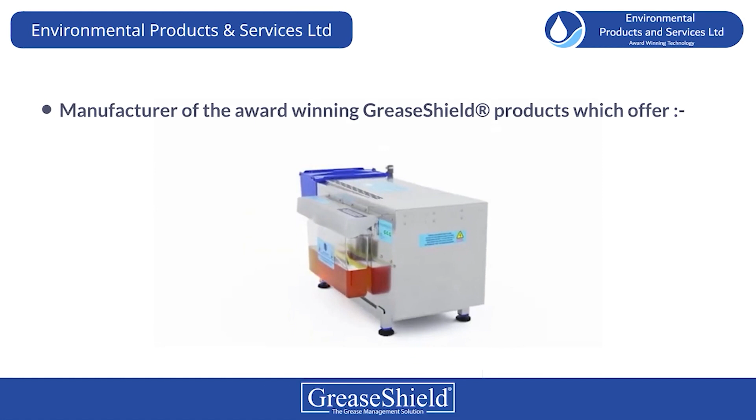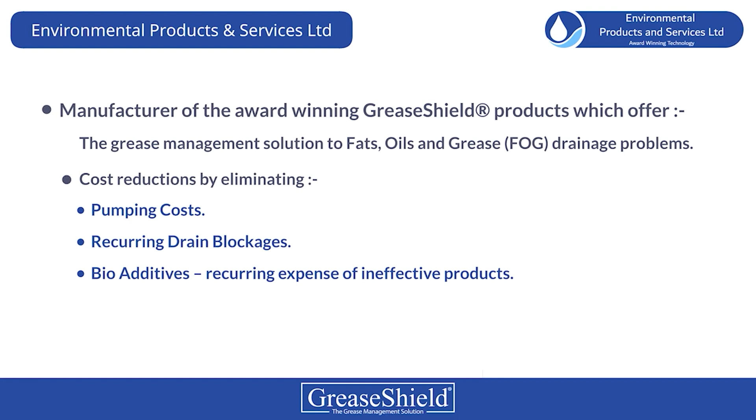Environmental Products and Services Limited, manufacturer of the award-winning GreaseShield products, which offer the grease management solution to fats, oils and grease (FOG) drainage problems. Cost reductions by eliminating pumping costs, recurring drain blockages, bioadditives, recurring expense of ineffective products, heating element and achieving energy cost reductions. Our corporate mission is to protect the environment by delivering cost-effective, sustainable and environmental solutions to FOG drainage problems.

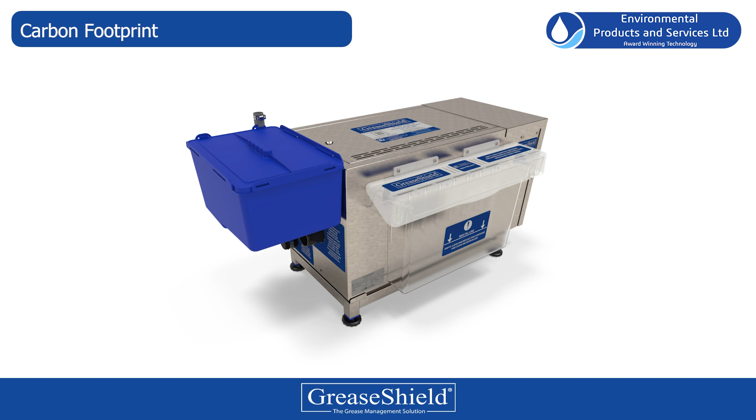Environmental Protection Agency (EPA) research indicates that biodiesel emits 11% less carbon monoxide and 10% less particulate matter than diesel. A study done by the U.S. Department of Energy and Agriculture found biodiesel reduces net carbon dioxide emissions by some 74% to 78%. Unlike petroleum diesel, which contains sulfur and carcinogenic benzene, biodiesel is non-toxic and biodegradable.

Biodiesel is produced from vegetable oils, yellow grease, used cooking oils, or animal fats. The fuel is produced by transesterification, a process that converts fats and oils into biodiesel and glycerin, a co-product.

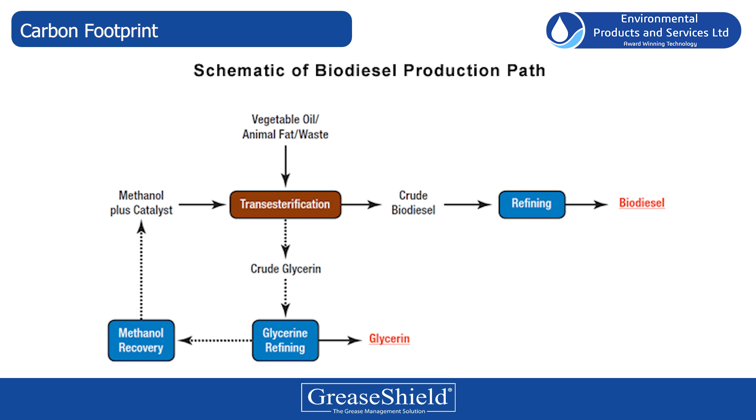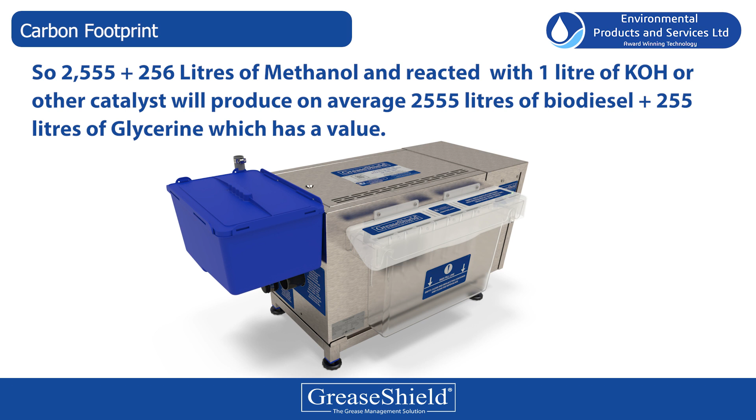7 liters of FOG per day harvested on average by each GreaseShield will add up to 2,555 liters per annum. So 2,555 plus 256 liters of methanol reacted with 1 liter of KOH or other catalyst will produce on average 2,555 liters of biodiesel, and 255 liters of glycerin, which has a value.

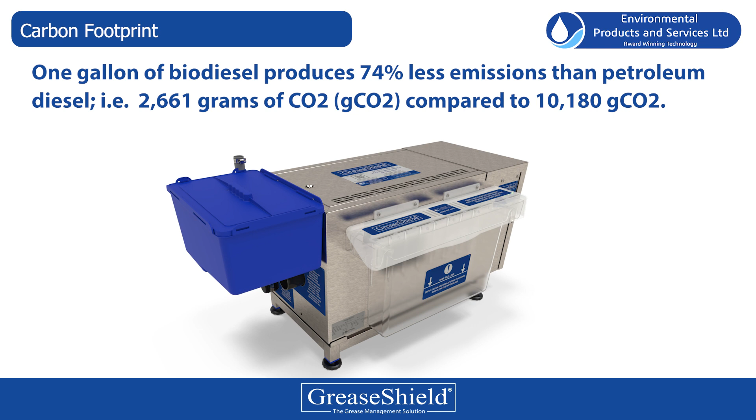1 gallon of biodiesel produces 74% less emissions than petroleum diesel, i.e. 2,661 grams of CO2 (gCO2), compared to 10,180 grams CO2.

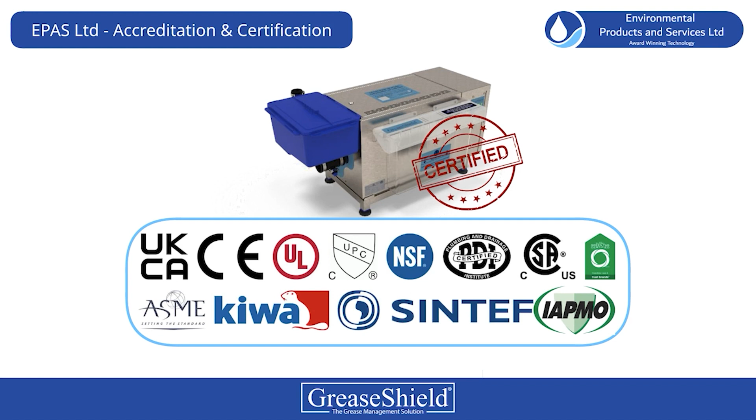EPAS Limited is also accredited with the following industry standards. EPAS Limited products are globally certified to all known and recognized North American and European grease trap interceptor standards, along with being the only grease trap interceptor in the world to be green eco-certified by Green Tag Global. Our products meet and exceed all local guidelines.

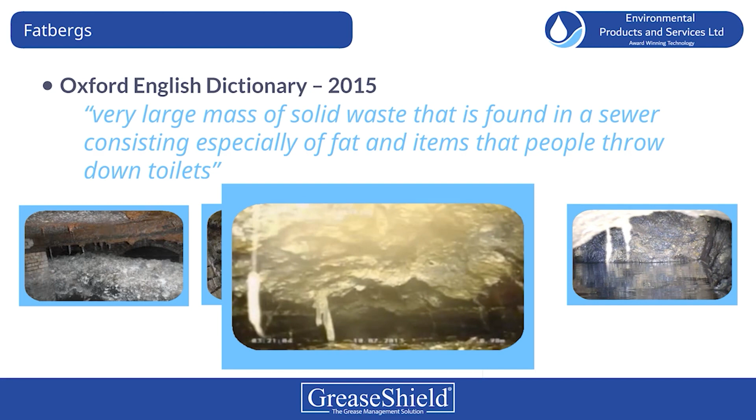Fatbergs: these are very massive solid waste found in a sewer, consisting especially of fat and items that people throw down toilets.

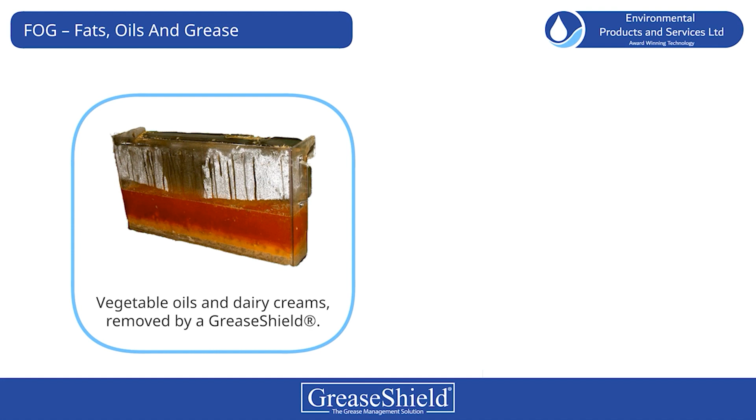Fats, oils, and grease, vegetable oils and dairy creams are removed by a Grease Shield. Utilizing waste thermal energy, the Grease Shield removes solidified animal fats, demonstrating the Grease Shield's ability to remove emulsified animal fat from wastewater.

Saturated fats and calcium. Saturated fats are not heart healthy, since they are well known for raising cholesterol levels in people with high-fat diets. Reacting with calcium deposits ultimately results in arterial blockages, which can lead to heart attacks and strokes.

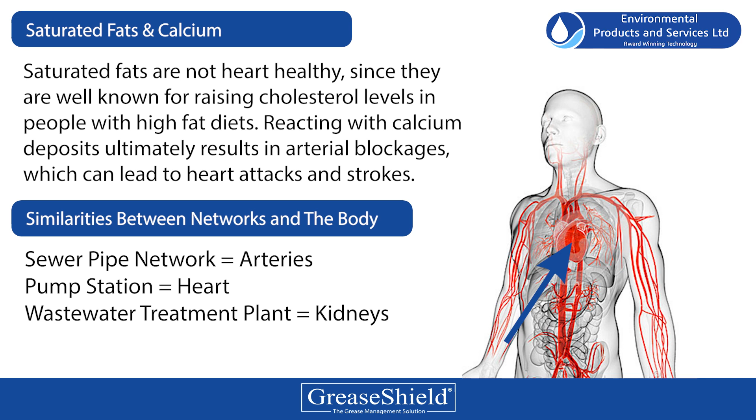Similarities between networks and the body: sewer pipe network equals arteries, pump station equals heart, and the wastewater treatment plant equals kidneys.

FOG and commercial kitchen drain contamination sources include prepping, cooking and cleaning. FOG is a natural byproduct of most cooking and food preparation. Fats from meats, dairy and animal products. Vegetable oils and lard used in baking, cooking and frying.

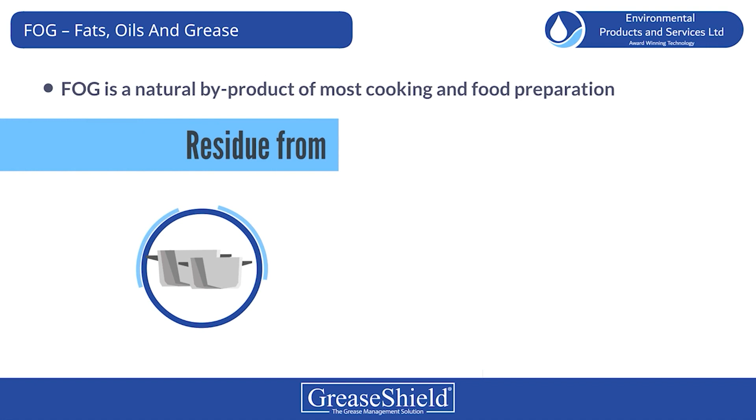Residue from pots, pans, and dishes after cooking. Oils naturally present in most vegetables. FOG wastes enter the sewer system via drains and congeal to clog lines.

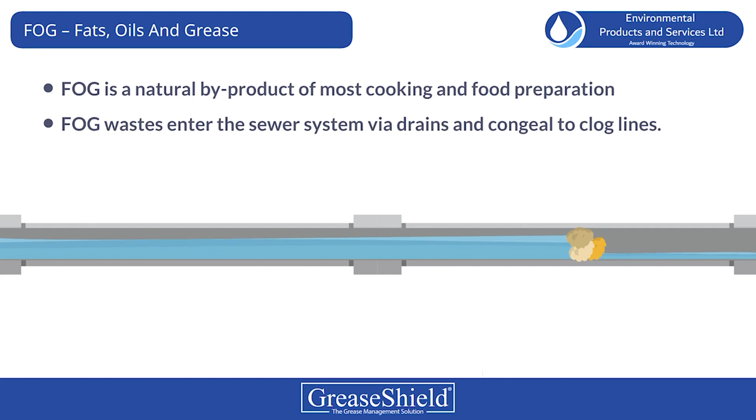The effect of FOGs in the UK. FOG facts: 366,000 blockages in a year for water companies alone, costing over £88 million. Greater than 80% of blockages are avoidable, caused by non-flushable products and FOG.

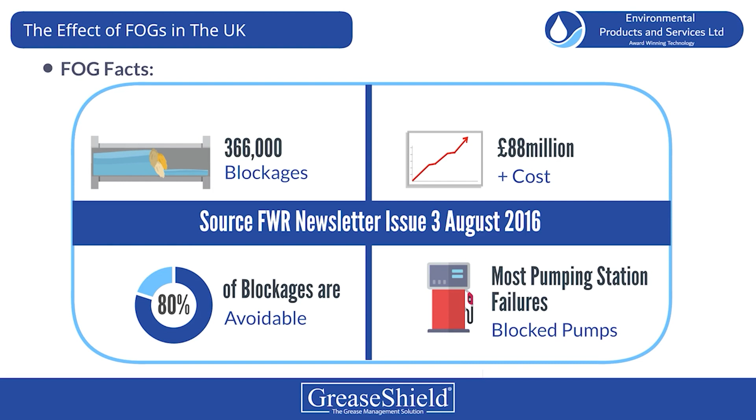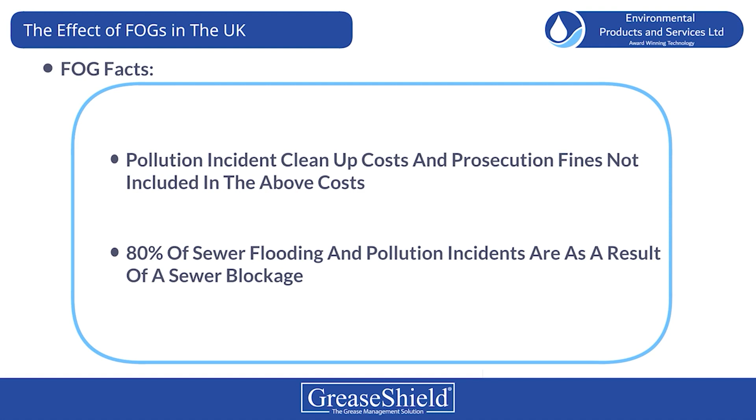The majority of pumping station failures are the result of blocked pumps, not included in the above costs. Pollution incident cleanup costs and prosecution fines are also not included. 80% of sewer flooding and pollution incidents are as a result of a sewer blockage.

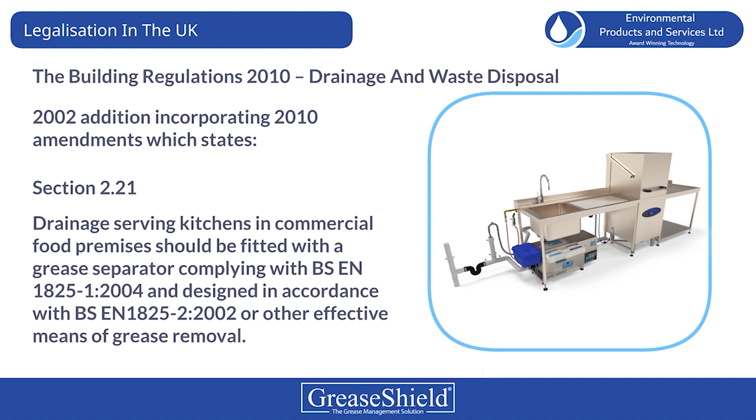Legalization in the UK: The Building Regulations 2010, Drainage and Waste Disposal, 2002 edition incorporating 2010 amendments, states in Section 2.21: drainage serving kitchens in commercial food premises should be fitted with a grease separator complying with BS EN 1825-1:2004 and designed in accordance with BS EN 1825-2:2002, or other effective means of grease removal.

Water Industry Act 1991, Section 111: It is a criminal offence under Section 111 of the Water Industry Act 1991 to cause or knowingly permit discharge into the public sewers of any matter which may interfere with the free flow of wastewater. Where the water company has incurred costs in removing blockages, cleaning sewers, investigating and remedying flooding or pollution incidents, it can take legal action to recover these costs.

Water Industry Act 1991 fines. M&B, the Turnpike: £91,000. Dosing fluid - the court heard the Turnpike was using a type of grease management called enzyme dosing, which doesn't remove fats and oils at source, meaning they can still cause problems in the sewer network. The Angel, Henley: £16,000. No grease management.

Saffron Cottage at Ford: £9,266. No grease management. Food Express in Mansfield Road, Nottingham: £8,419. No grease management. Café Saffron in Church Road, Codsall: £5,495. No grease management.

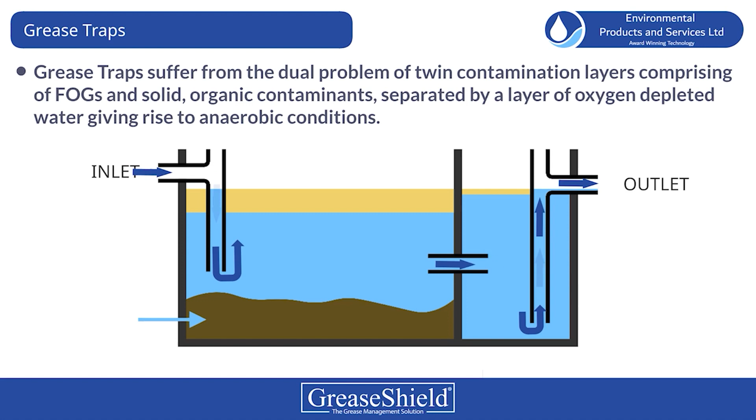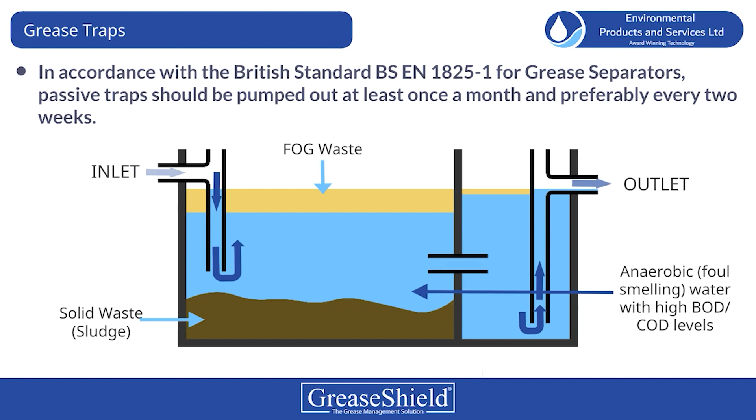Grease traps suffer from the dual problem of twin contamination layers comprising fats, oils and greases and solid organic contaminants, separated by a layer of oxygen-depleted water giving rise to anaerobic conditions. Most grease traps are undersized. It is estimated that greater than 55% of the entrained fats will simply pass through the grease trap to cause problems downstream. In accordance with British Standard BS EN 1825-1 for grease separators, passive traps should be pumped out at least once a month, and preferably every two weeks - a costly, recurring expense for an inefficient process that does not eliminate the problems downstream.

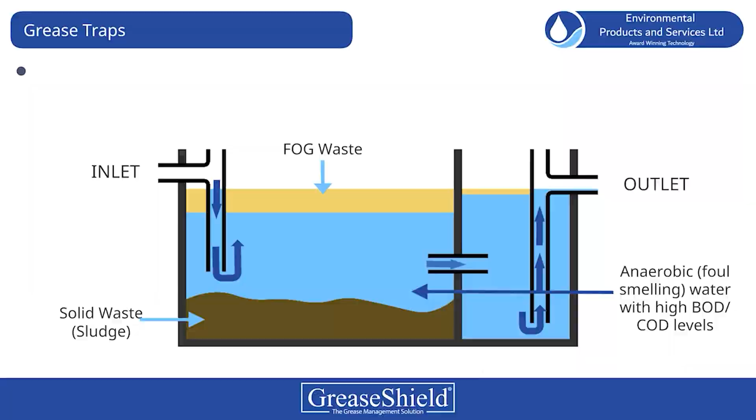GreaseShield GS 1850 PF. Superior performance removing more fats, oils and grease compared to competitor products.

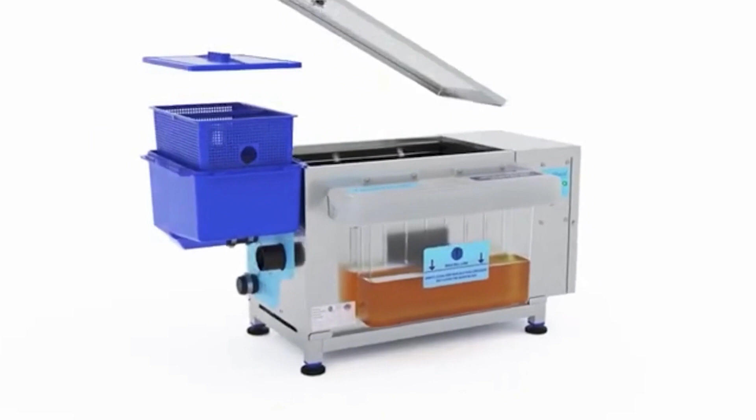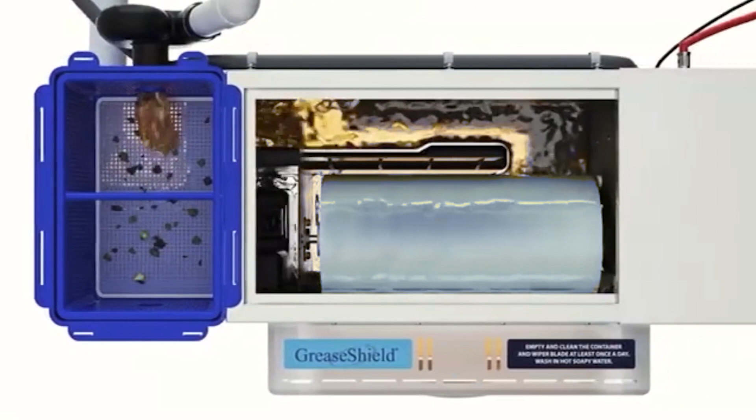The world's best and only eco-certified grease recovery unit. Automatically removes solid food waste, fats, oils and grease, including emulsified animal fats. Cost savings by eliminating frequent pumping costs, grease trap cleaning, and recurring fat and oil drain blockages.

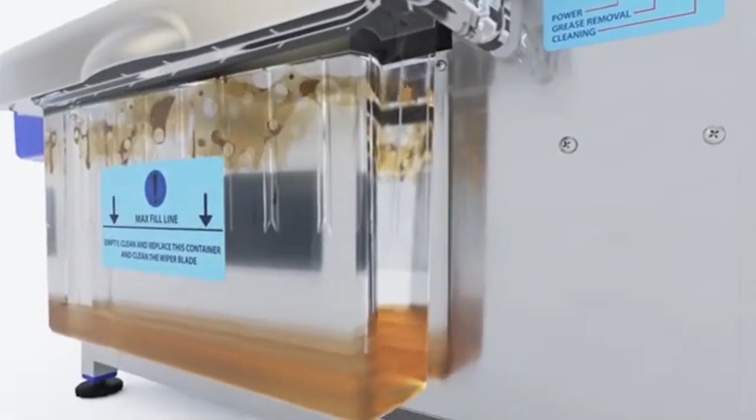Eco-friendly with the lowest energy consumption in its class. No heating element, no risk of a fat or oil fire. User-friendly, with no need for staff to access the internals of the machine, and no more foul-smelling grease traps.

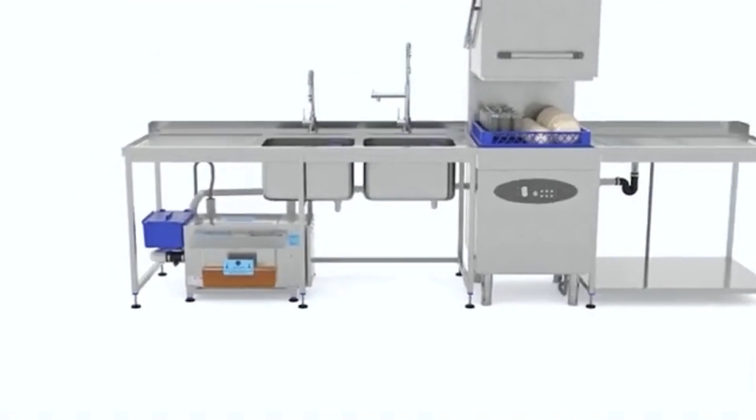Grease Shield functionality: superior performance to any competitor. Automatic removal of fats, oils, grease and food waste. User-friendly, eliminating frequent pumping costs. Cost savings, eliminating fat-related drain blockages. Odor-free, harvesting a source of renewable energy.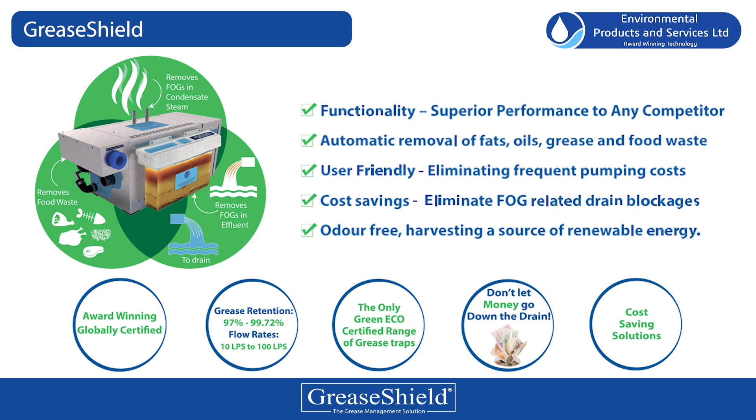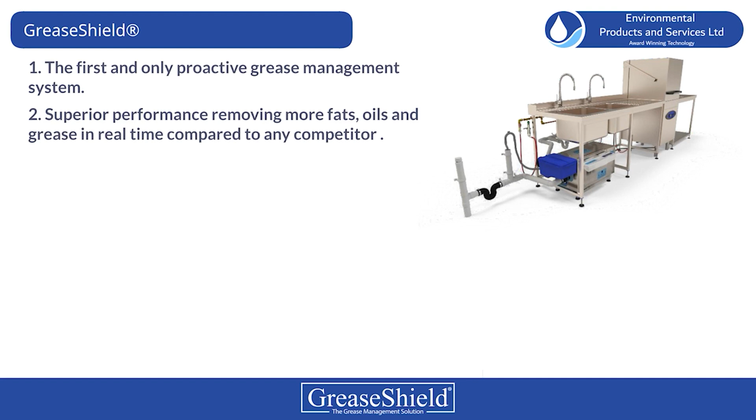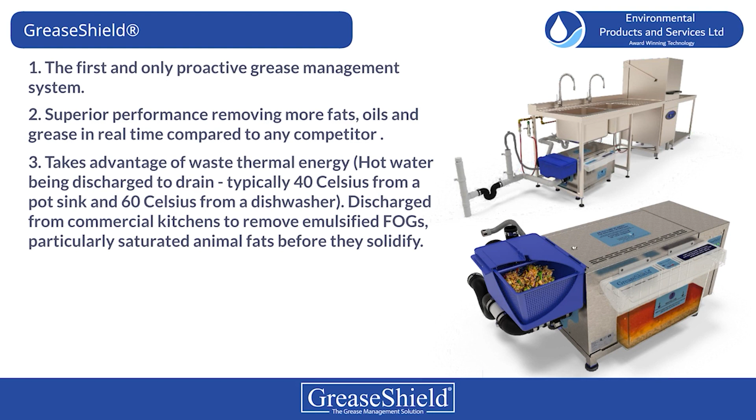One: the first and only proactive grease management system. Two: superior performance removing more fats, oils and grease in real time compared to any competitor. Three: takes advantage of waste thermal energy discharged from commercial kitchens to remove emulsified fats, particularly saturated animal fats, before they solidify. Four: removes and dewaters organic solid matter, preventing anaerobic foul-smelling conditions brought about by biological activity depleting dissolved oxygen present in the effluent.

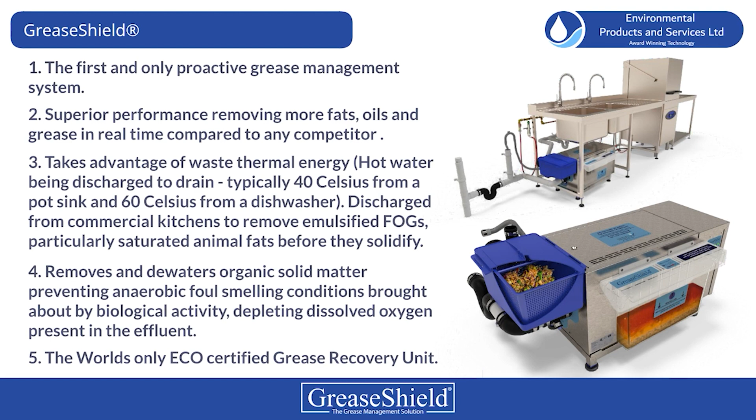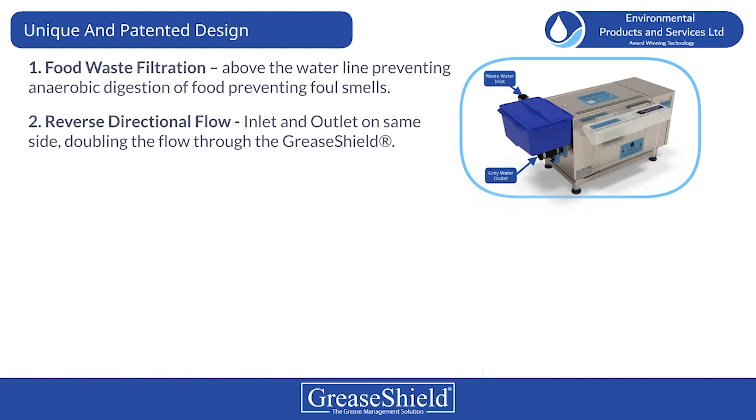Five: the world's only eco-certified grease recovery unit. Unique and patented design. One: food waste filtration above the water line, preventing anaerobic digestion of food and preventing foul smells. Two: reverse directional flow, inlet and outlet on the same side, doubling the flow through the GreaseShield. Three: seven baffle system to enhance the removal of fat. Four: oleophilic and hydrophobic roller, attracts fat and repels water.

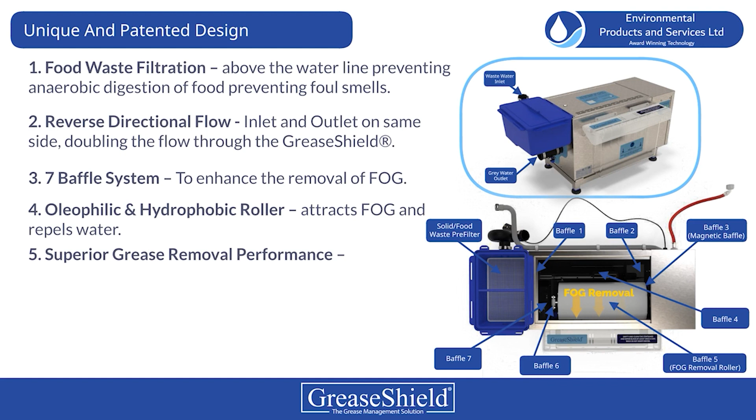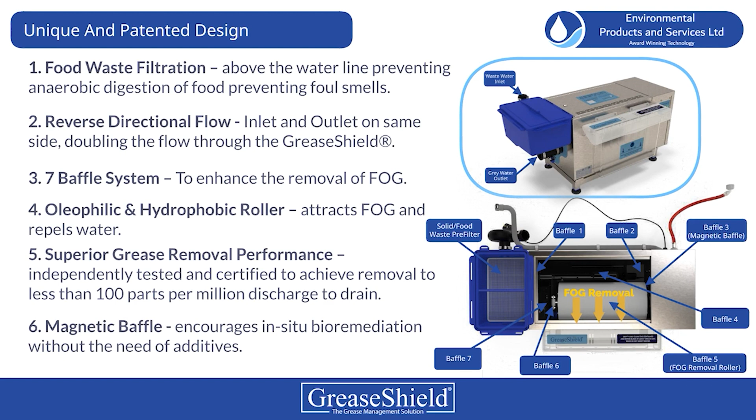Five: superior grease removal performance, independently tested and certified to achieve removal to less than 100 parts per million discharge to drain. Six: magnetic baffle, encourages in-situ bioremediation without the need for additives.

Fat to fuel: GreaseShield can be the first stage in the production of a renewable energy biomass. One GreaseShield harvests on average 7 liters, or 1.85 US gallons, of fat per day, adding up to 2,548 liters, or 673 US gallons, per year.

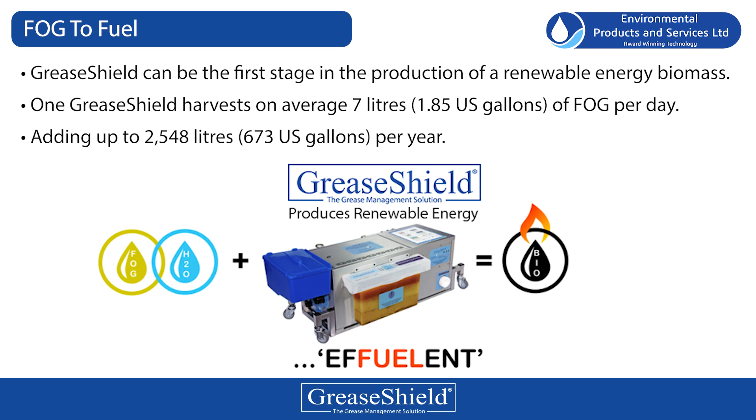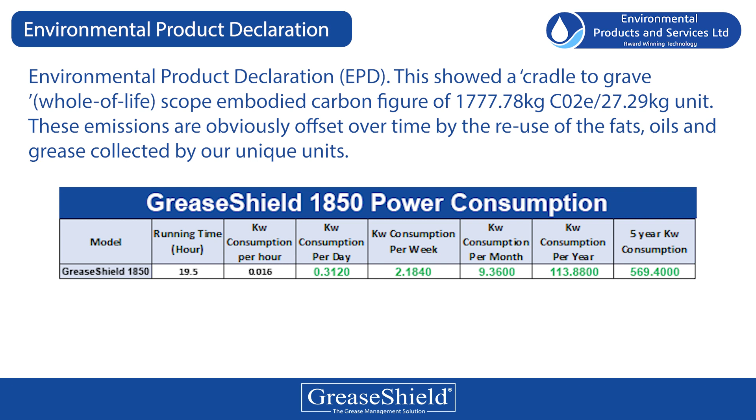Environmental Product Declaration (EPD). This showed a cradle-to-grave, whole-of-life scope embodied carbon figure of 1,777.78 kilograms CO2e per 27.29 kilogram unit. These emissions are obviously offset over time by the reuse of the fats, oils and grease collected by our unique units. Having regard to the electrical consumption of the typical Grease Shield unit, and at 265 grams of CO2 per kWh, it consumes 5.84 kWe per annum, generating 1.5476 kWe per annum. Thus, the Grease Shield product range contributes to a sustainable future and a net carbon offset.

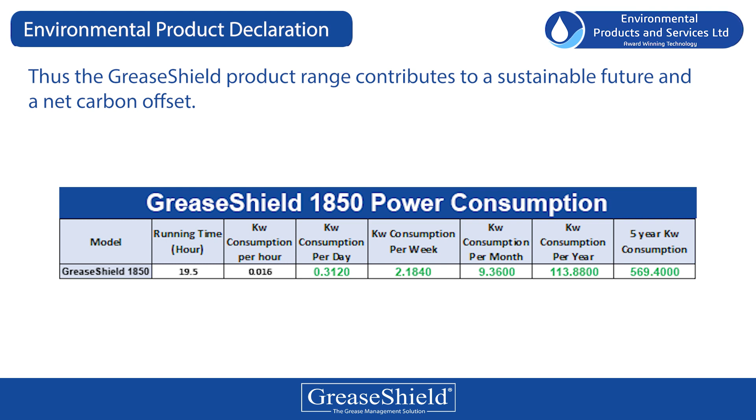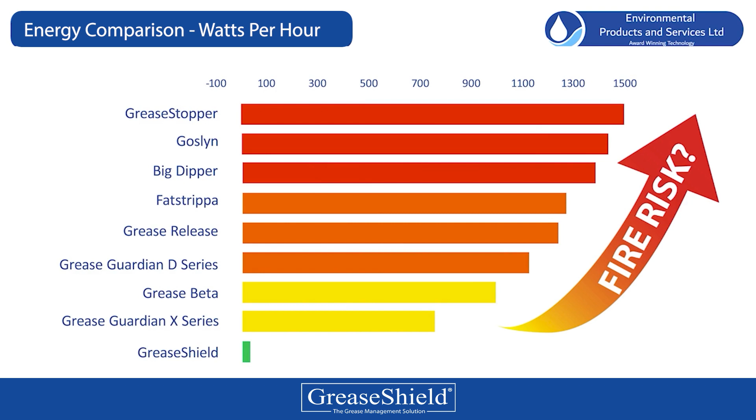The energy consumption of the Grease Shield is the lowest in its class compared to competitor grease removal systems that use heating elements. Heating elements are not only expensive to run and maintain, but can also cause a fire risk in the kitchen. Heating elements that come into contact with fats, oils and grease will begin to cook the grease and eventually catch fire. Independent testing and results.

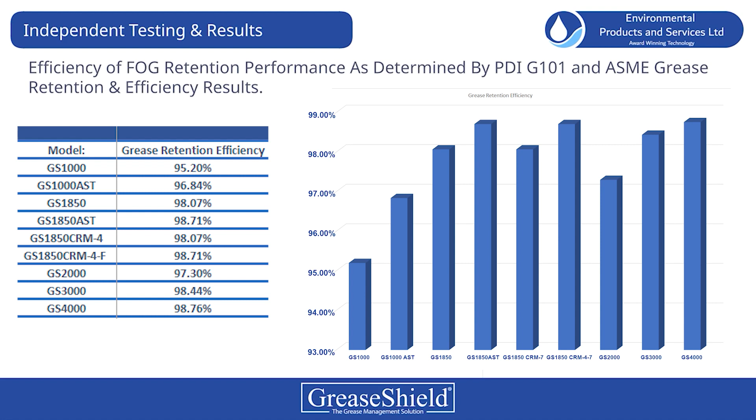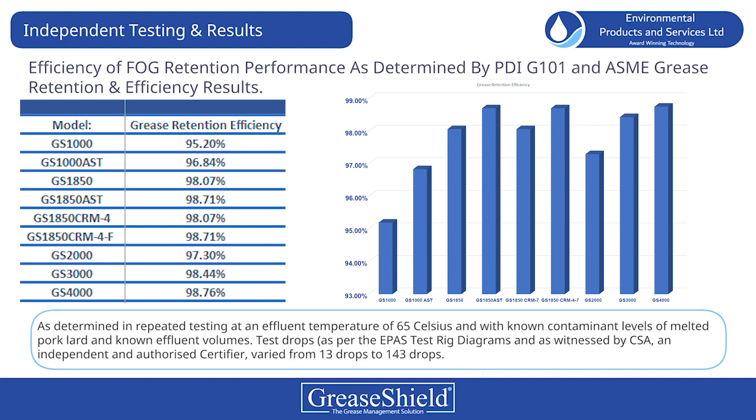Efficiency of FOG retention performance as determined by PDI-G101 and ASME grease retention and efficiency results, as determined in repeated testing at an effluent temperature of 65 Celsius with known contaminant levels of melted pork lard and known effluent volumes. Test drops, as per the EPAS test rig diagrams and as witnessed by CSA, an independent and authorized certifier, varied from 13 drops to 143 drops.

Dublin City Council test results: 40 locations, with an average of 56.16 parts per million discharge of FOG to drain.

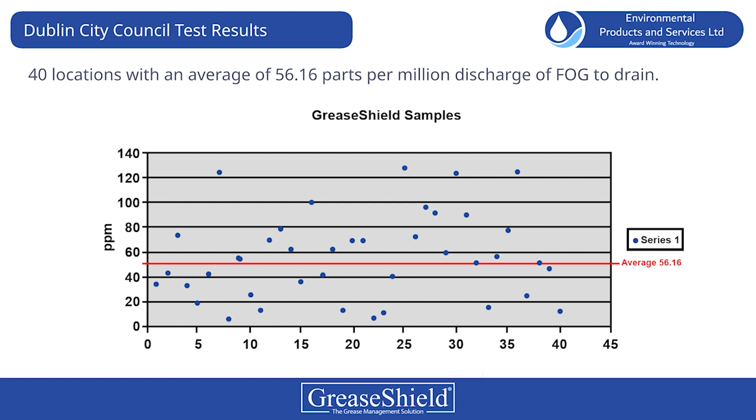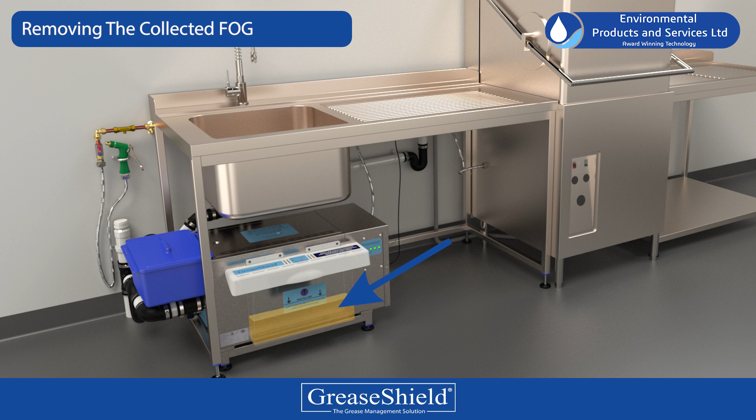When the fog is collected, ensure to empty the fog container located in front of the GreaseShield. This can be removed by the handles located on the side of the container and is simply lifted. The fats, oils and grease must then be deposited into a storage container that should be stored onto a bunded pallet, either internal or external of the premises.

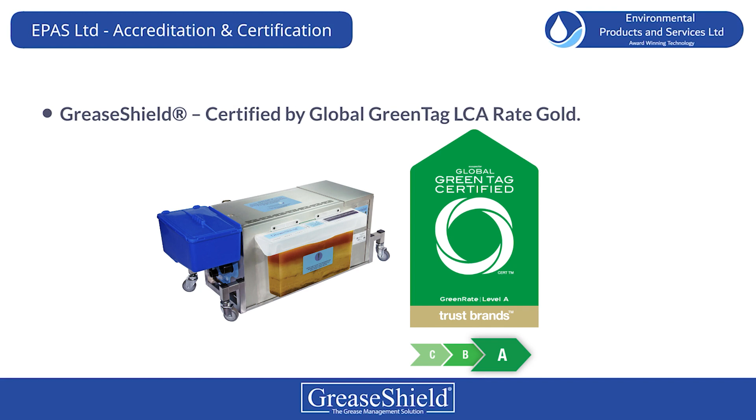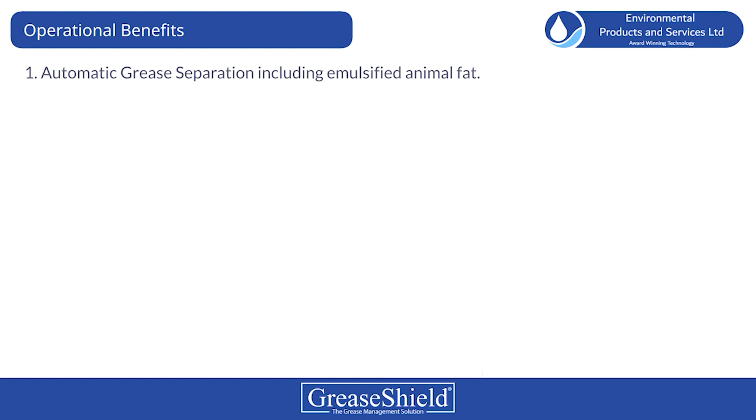Operational benefits: automatic grease separation including emulsified animal fat, food waste and solids removal, self-emptying and internal self-cleaning. Cost savings by eliminating frequent pumping costs, grease trap emptying and recurring drain blockages. Cost saving as no requirement to purchase enzymes or bio-additives. User-friendliness, no need for staff to access the internal of the machine and no more foul-smelling grease traps. No silt valve to allow the discharge of fats, oils and grease to the drain line.

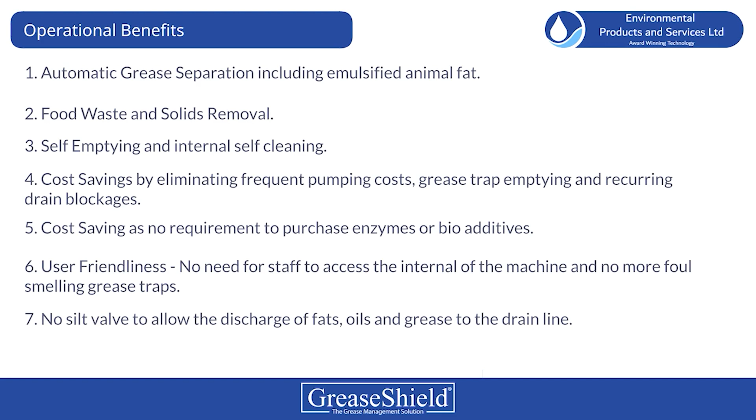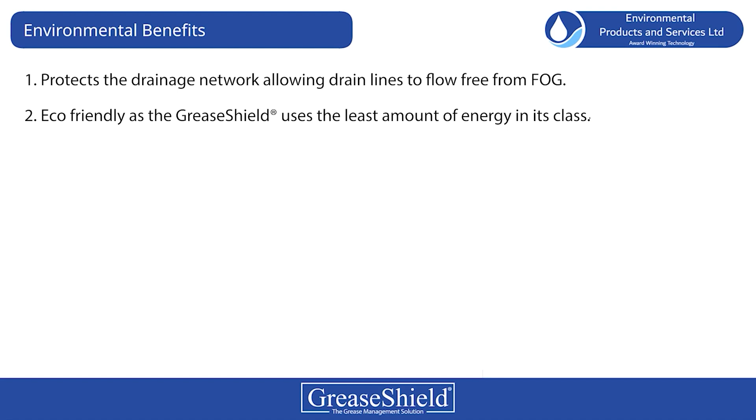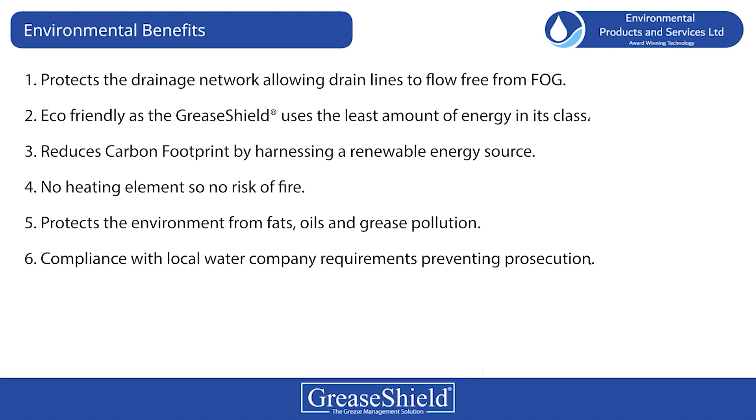Environmental benefits: protects the drainage network, allowing drain lines to flow free from fog. Eco-friendly, as the grease shield uses the least amount of energy in its class. Reduces carbon footprint by harnessing a renewable energy source. No heating element, so no risk of fire. Protects the environment from fats, oils and grease pollution. Compliance with local water company requirements, preventing prosecution.

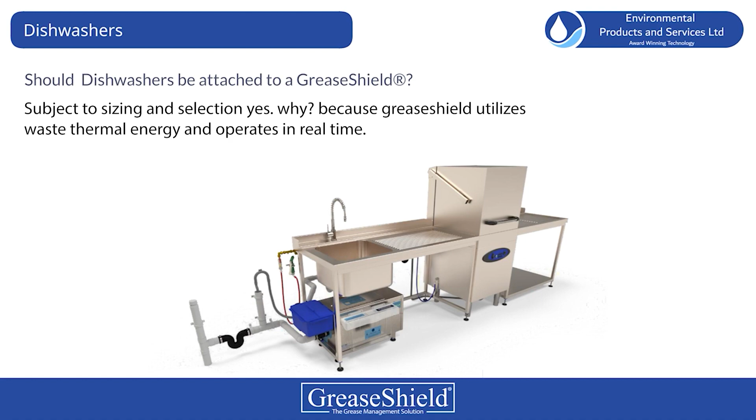Dishwashers: should dishwashers be attached to a grease shield? Subject to sizing and selection, yes. Why? Because grease shield utilizes waste thermal energy and operates in real time. It's not only fogs causing problems - our grease shield and filter shield units can connect to multiple contamination points to eliminate any issues within the kitchen.

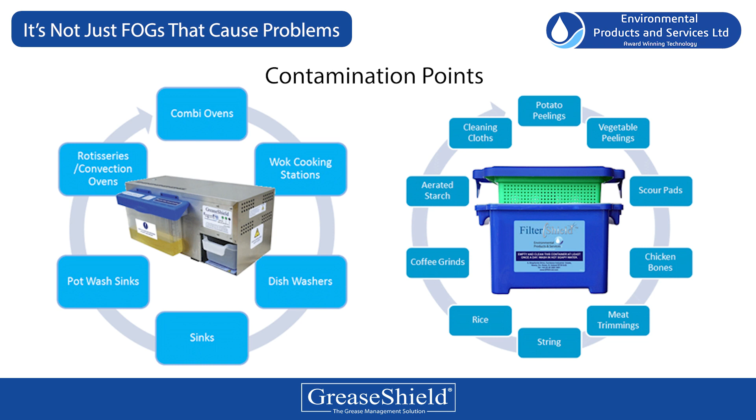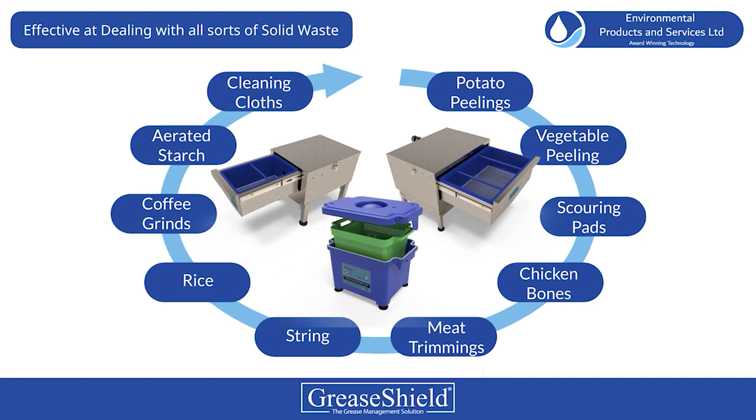Filter Shield: food and solid waste removal. A low-cost solution for separation of food waste, coffee grinds and starch. Effective at dealing with all sorts of solid waste, like potato peelings, vegetable peelings, scouring pads, chicken bones, meat trimmings, string, rice, coffee grinds, aerated starch, cleaning cloths and more.

Key applications: a solids interceptor such as a filter shield should be installed with preparation sinks for meat, fish, sandwiches, etc. Sinks used for rice washing. Potato peelers and rumblers. Sinks used for disposal of coffee grinds. Pot wash and pre-rinse sinks.

Why do commercial kitchens need filter shield? Food waste, coffee grind, vegetable peelings, potato starch, collected FOG in GreaseShield container.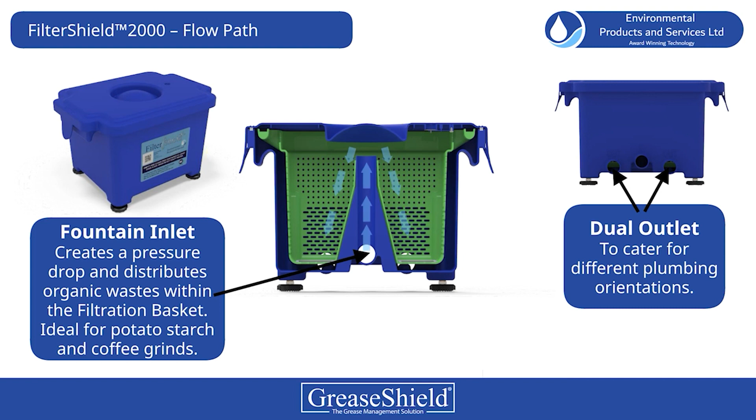Fountain inlet controls the flow and distributes it within the filtration basket. Dual outlet to cater for different plumbing orientations. Filter Shield TM1000 flow path: inlet pipe controls the flow and distributes it within the filtration basket. Balance tank managing the incoming flow whilst the solid waste is filtered. Drawer filter: the pull forward drawer allows access to the filter basket, even when positioned under sinks or shelves.

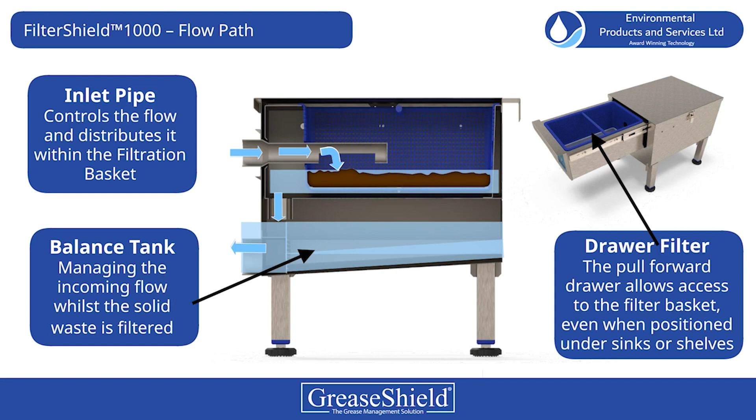Filter Shield operational benefits: no moving parts, no energy costs, up to 25 liters storage capacity. Saves money on plumber and call-out charges. A low cost-effective solution at dealing with all solid waste.

Sanic Shield: help control the spread of harmful viruses including coronavirus by carrying out daily fogging in your kitchen and seating areas. Benefits: kills 99.9% of all known viruses including coronavirus, protecting your staff and customers.

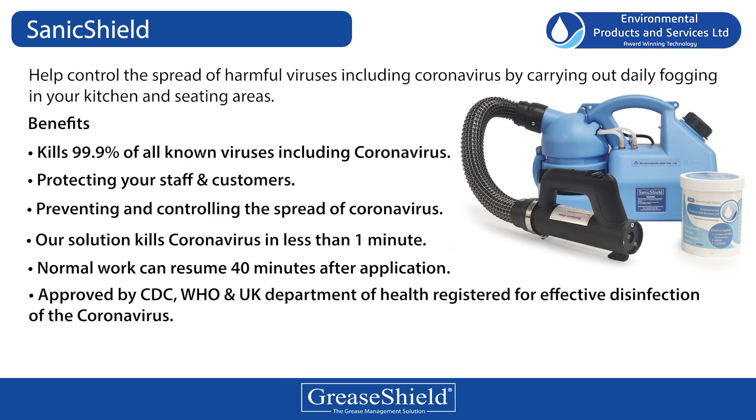Preventing and controlling the spread of coronavirus, our solution kills coronavirus in less than 1 minute. Normal work can resume 40 minutes after application. Approved by CDC, WHO and UK Department of Health, registered for effective disinfection of the coronavirus.

Service and customer support: compliance with local water requirements including the Water Industry Act 1991. Project design specification, 2D AutoCAD and 3D Revit. Sizing and selection, site survey. Installation, service and maintenance, and staff training.

Our story so far: Grease Shield, Filter Shield, FlexiPlumb, Combi Pump, Grease Scepter, Sanic Shield, Genie H2O, smart sensor and telemetry PLC.